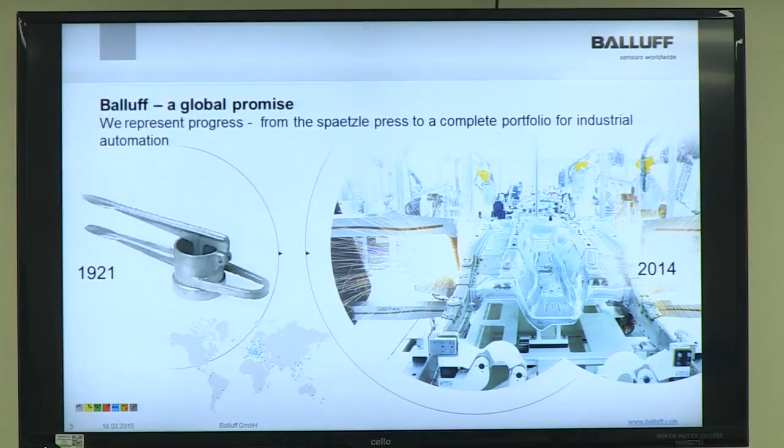So Balluff started in 1921. The first generation, Mr. Balluff, started manufacturing the noodle press. That was the first thing he did. Many developments since then, and through 90 years, factory automation, industrial automation is what we're involved with now.

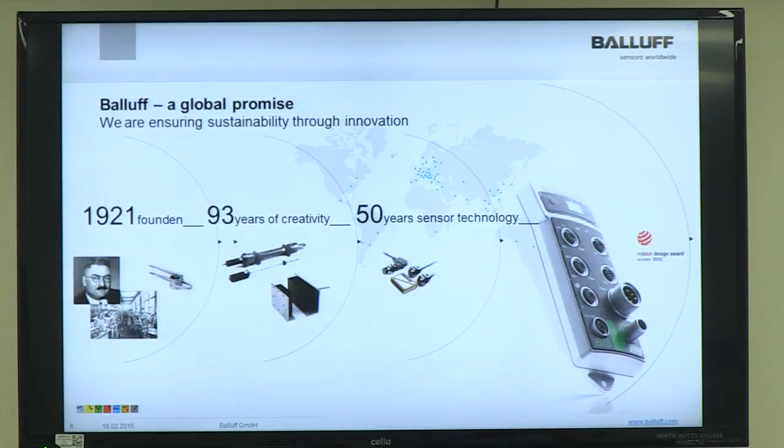After noodle presses and bike shops, around 50 years ago we started manufacturing the first electrical and mechanical technologies, and that's when we first started applying for patents on inductive and mechanical technologies. We started making the first remote sensor systems - this is power and signal across an air gap, a technology Balluff is very proud of, and you can see some of that in the case and some of the demonstration rigs in the foyer. Right up to this particular product, one of our RFID products, of which we've won many awards.

The Red Dot Design Award is something we won for that, a design award we're awarded across the whole industry - people making kitchens, consumer goods - so it's a design technology award. Again, something Balluff is very proud of.

So we break the product and then take it out and say, look, component X has failed. Let's find a new manufacturer or a different way of putting that component on there. Test it again - it will last a few hours longer. This doesn't mean we offer different warranties; it just means intrinsically the way we develop our products is the best it can be.

And just before we get onto the hydraulic side, we have a massive range of products. We fall into business units: object detection, that's the inductive, mechanical, capacitive, ultrasonic sensors I mentioned.

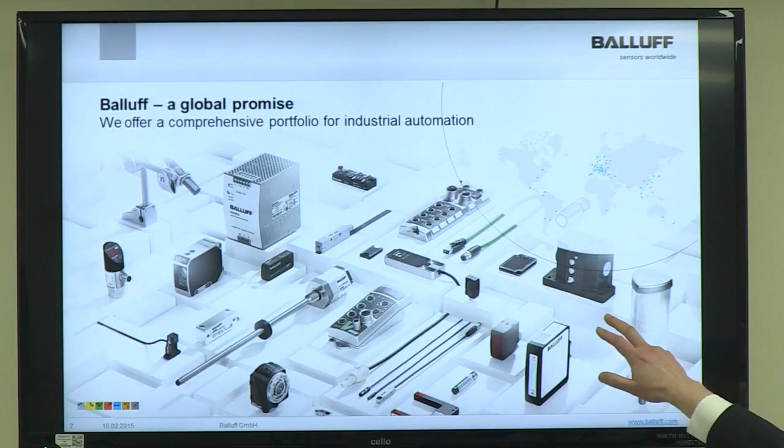The block at the top there is from our networking department, and with the IO-Link system which we've now got, which you can see again in the case and out in the foyer, we've really started to make inroads into factory automation in the last few years - really changing the way people automate factories and moving towards a more smart factory. Something we can chat about afterwards, after the presentation, if it's of interest.

RFID systems - again, when we started doing these 30 years ago, particularly in machine tools, we really changed the way machine tools and CNC machining was done.

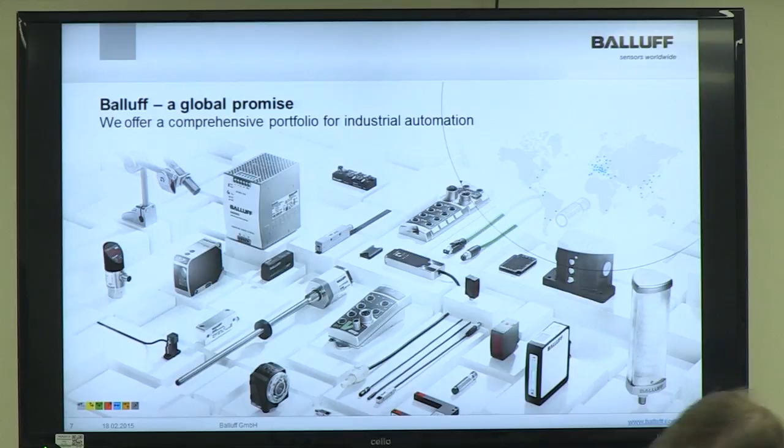An overview of just a couple of products which we get involved with more into the hydraulics industry: pressure sensors, pressure transmitters, fill levels for power packs, accumulators, capacitive sensors.

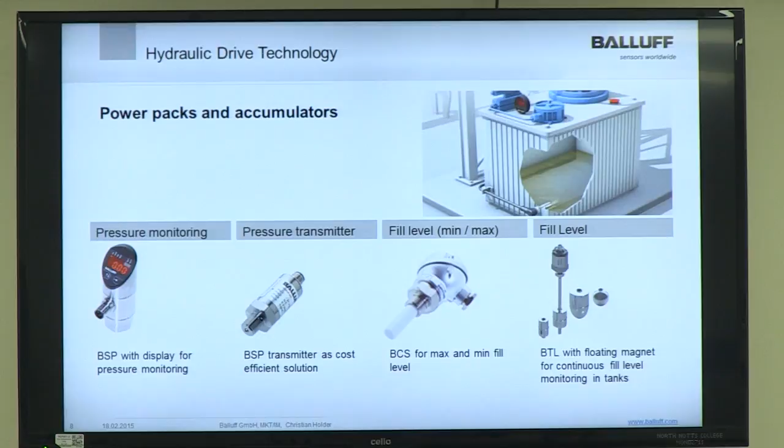We have a technology on a capacitive sensor called Smart Level, which has got a patent on it. What this does, the sensor will ignore foaming in a tank and only give a true level output, and also ignore dirt and build up on the sensor front face, so it doesn't give any false readings.

And then we get involved in sensors and transducers inside cylinders, transducers in the cylinder, sensors for detecting piston end stops, soft stops, spool and valve controlling as well.

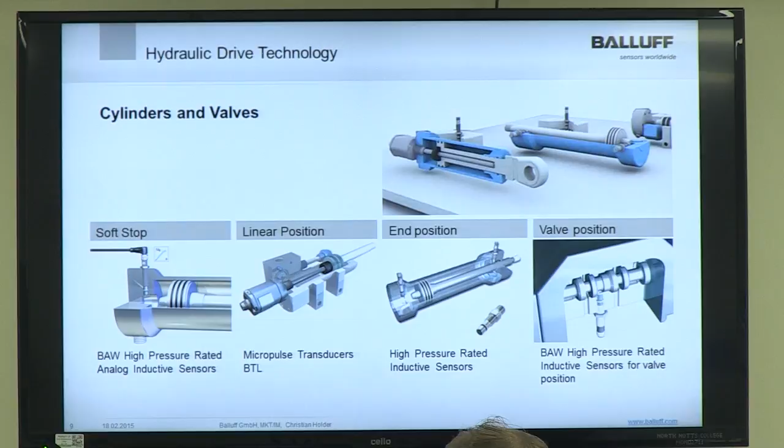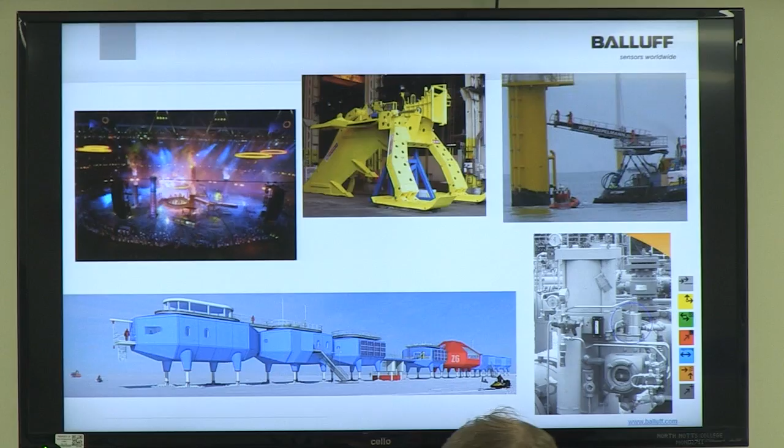So into our world of hydraulics, there's automation all around, it's increasing all the time. Personally, we get involved in all areas except, I suppose we stop at the PLC, so from the PLC downwards. But the sensor switches and automation in the panel, in the accumulators, in the power packs, in the valves, and also in the hydraulic actuators.

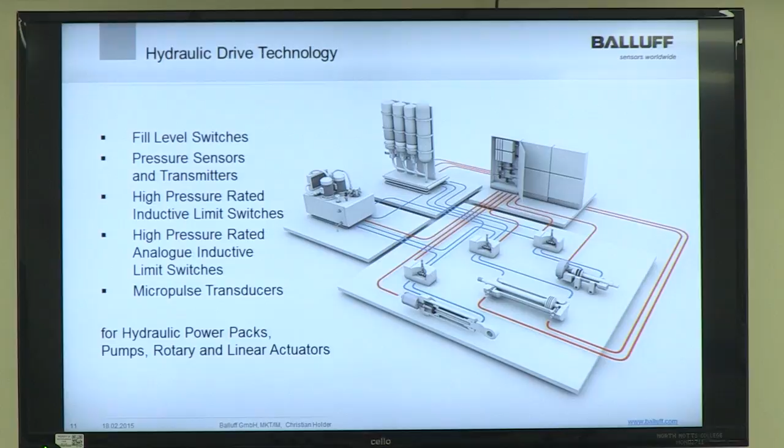So I just want to focus now on the hydraulic actuator area and just talk about some of the positioning technology around that.

Why do we need to know where our actuator is? The same as any automation trends, we need to do things faster, we need higher accuracy, we need less downtime, better production rates. Therefore we need to monitor all the way along the cylinder what's happening, where is our position. So quite often just on or off is not good enough in the world of automation these days.

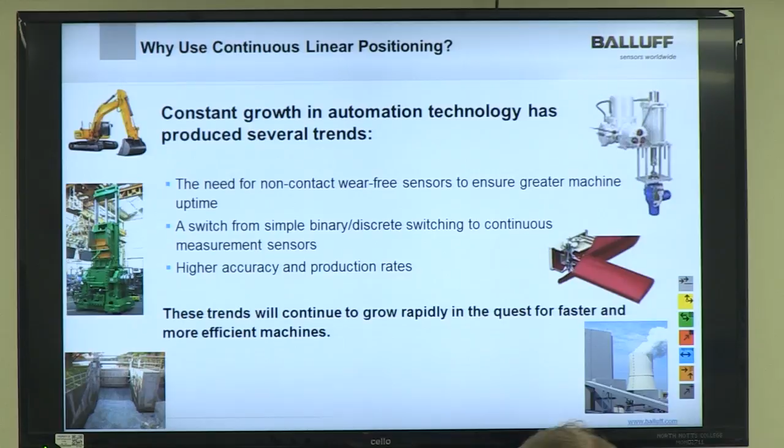So linear feedback generally falls into three fields. First, we've got to control linear motion, which is closed loop control, such as a flight simulator, or something like this, where you need to move it fast, slow it down, move it again. And when you're selecting a sensor for this application on the hydraulic cylinder, speed and accuracy are the most important things you need.

The next area, and I think this is where the bulk of hydraulic actuators fall into for position feedback, would be monitoring linear position - monitoring the position of a cylinder. Did it get there? Has it come all the way back? It's like an infinitely variable proximity switch on a hydraulic cylinder. The most important factor we need to consider here is repeat accuracy on the sensor which we select.

And finally, to make measurements with our cylinder - the actuator needs to measure where we are, whether we're profiling something, doing a cut to length measurement. In the device we select here, the most important thing is the linearity of the device, so the accuracy needs to have high linearity on there. So they're often different in the different devices you might select.

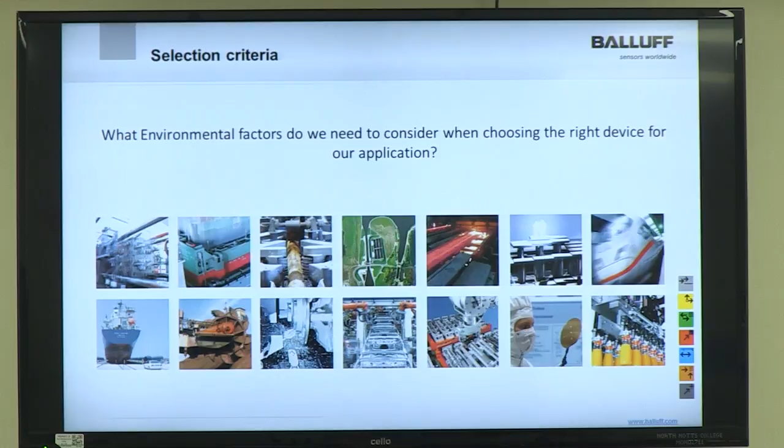So we've talked about accuracy. Environmental factors may seem obvious, but there are so many considerations we have to take into account. Some images here, civil engineering - is it out in all sorts of weather? Is it underwater? Is it seawater? Temperature - am I in a steel mill? Am I, like the previous picture, out in the snow? Is it on a power press, being rattled, shaken, on a train?

Access to the device itself - do I need to get to it? Do I need to change it? Do I need to maintain it? How big does it need to be? Is it a fit and forget device? Do I need to service the device?

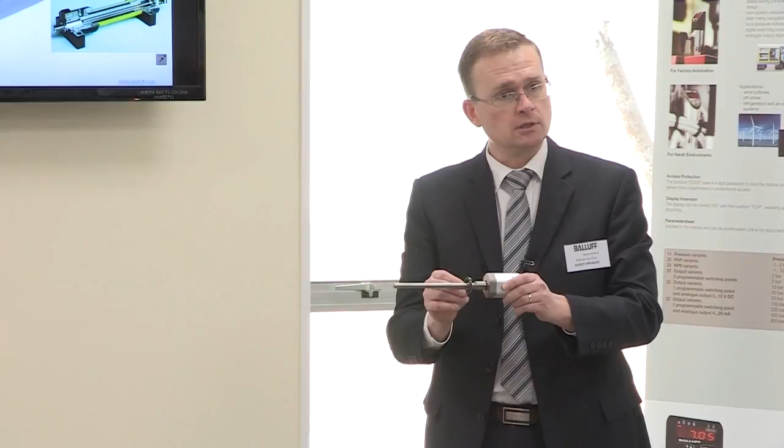On the hydraulic cylinder, generally for a transducer, we can sense internal or external. If we're internal, let's find a transducer - this is just one of our position devices. In the image on the right, we've got a transducer in a cutaway of a hydraulic cylinder. We'd have a magnet element bolted to the back of the piston, and as it moves up and down the rod, we've got a gun drill hole down the cylinder, giving us position feedback. From environmental considerations, if starting a project afresh with no time or money constraints, we'd always put a transducer inside the cylinder - it's the best packaging we can have. But many times you can't do that, so for retrofit applications there are many products on the market which you can mount external, so you could piggyback that on the outside of a hydraulic cylinder.

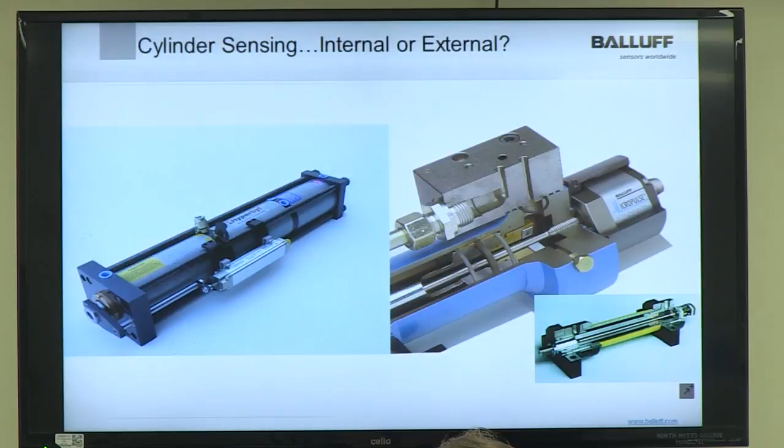Just a bit more into cylinder feedback systems. We discussed internal devices, and we'll discuss the technologies next - magnetostrictive, potentiometers and LVDTs, these are some of the popular technologies for position feedback on a cylinder. Not exhaustive, but some of the popular ones. For longer stroke cylinders, 10 metres plus, telescopic cylinders, lots of the cylinder manufacturers have developed their own particular measuring systems.

Limit switches on a cylinder - we could have an inductive sensor, this is just detecting metal, detecting the piston as it comes along. We've got a pressure seal and a high pressure front face here just to detect the cylinder position. We could also have the inductive sensor external to the cylinder, just picking up on a flag as it moves by, or this could be a mechanical limit switch mounted external.

Probably down to the lower cost cylinders, probably use smaller, more compact, used more in the mobile agricultural market. In recent years these have probably had no feedback whatsoever, but I think that's changing. Certainly in the last year or so, we've been involved in more and more inquiries to get position feedback sensors in there. But it's very expensive to do for a mobile cylinder - you've got to gun drill the cylinder and get the transducer in. Balluff are working on new technologies here to put into hydraulic cylinders for the mobile market, and hopefully if you're back here next year, we'll be able to chat about that technology.

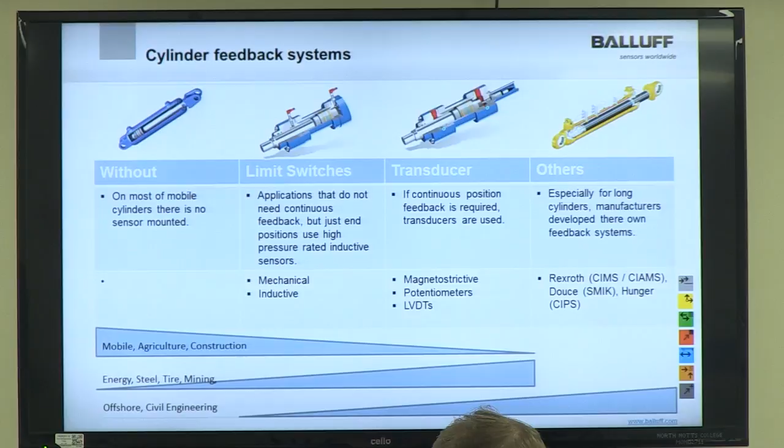Quickly onto the different technologies we get involved with in hydraulic actuator control. The first one, linear potentiometers - these are at the lower end price segment of the market. Analog output devices, lower accuracy, and they're less reliable. Depends what application you're using them for, but because it's a contact device, in some applications they will wear out.

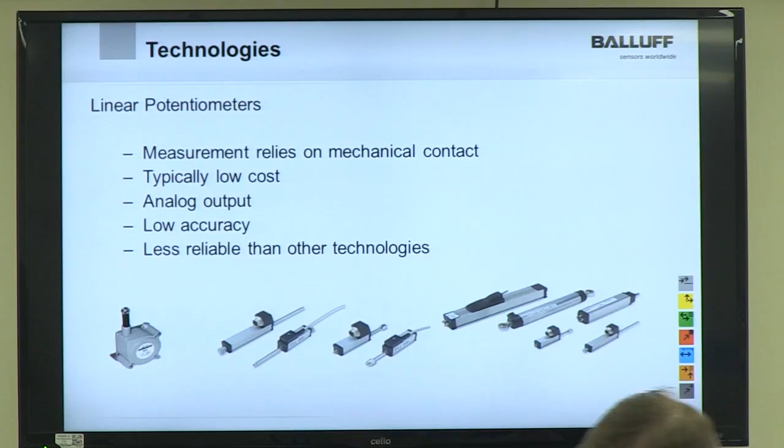So how they work: we've got a fixed resistive strip of a known resistance, voltage across it, and then the wiper, the position element, moves up and down this strip, and at one end there'll be a greater resistance or lesser resistance at the other end, giving a proportional output. Some applications are great, but say on an injection moulding machine, for example, if you're going 24/7 back and forth to the same part all day long, there's the potential for that to wear out in that one zone.

Next technology to talk about is LVDTs - this term is sometimes used to describe any position feedback device, but it's actually a technology in its own right, linear variable differential transformer. As the name suggests, it's a transformer - voltage in the primary windings, then we have a ferrite core moving in and out, inducing a different output voltage on the secondary windings. Basically how far the core moves in and out gives us a different output. This device is a non-contact device, better on vibrations than potentiometers, better on temperatures. But along with the potentiometer, because it's inherently a voltage device, that's all you get out of it, so if you want any other sort of signal, you've got to do extra signal conditioning on there.

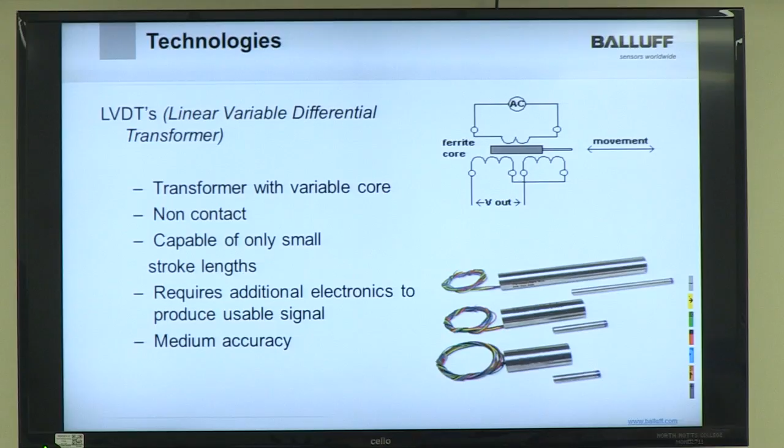Moving on now to magnetostrictive sensors - again these are non-contact like the LVDTs. We can get much higher accuracies out of these devices, and I'll explain how they work, but because it's a digital signal that comes out of them, the manufacturers generally have onboard signal processing to change it to analog, digital, field bus, any sort of interface you want. They're usually at least IP67. So how do they work?

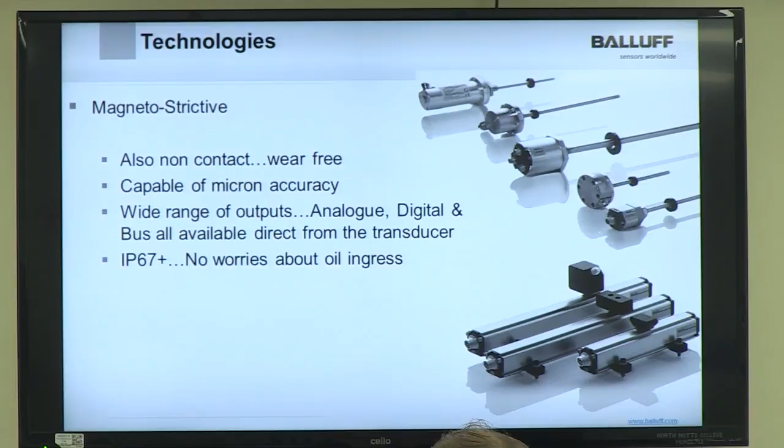On the inside of each transducer we've got a magnetostrictive device and a waveguide, which looks like this. Down the centre of this waveguide there's a thin copper wire. As you can see from the animation, essentially we have a current pulse which initiates an electromagnetic wave that moves up and down this rod.

The position marker, the magnet, interferes with this wave and creates what we call a strain wave. One part of this wave is bounced up and damped at one end, represented by the blue here. The other end comes back down to our electronics. The time from sending out our start pulse to the time it takes this strain wave to get back is proportional to the distance, as in a time of flight sensor. So that's how the magnetostrictive devices work.

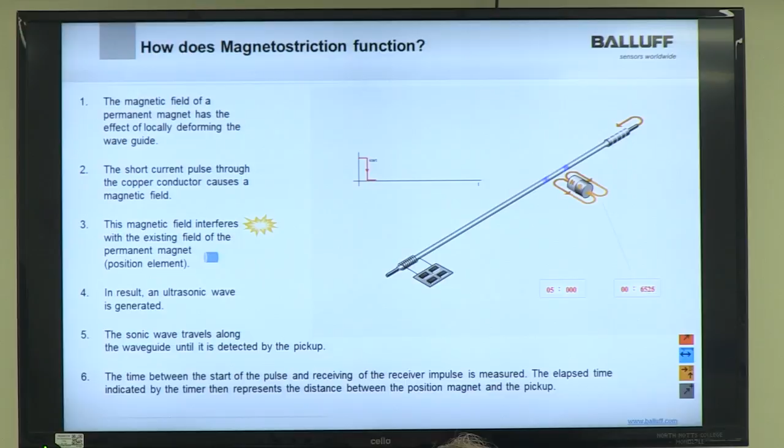Just briefly, let's look at the outputs from position feedback devices on hydraulic actuators. Analog is still by far the most common, for obvious reasons - people know what it is, and we can buy analog interface cards widely available. But there are limitations to it. For example, one limitation on a popular signal is 4 to 20 milliamps. You've got 16 milliamps to divide up across the stroke of your transducer, so the longer transducer you've got - 1, 2, 4, 5 meters - you're going to get less resolution.

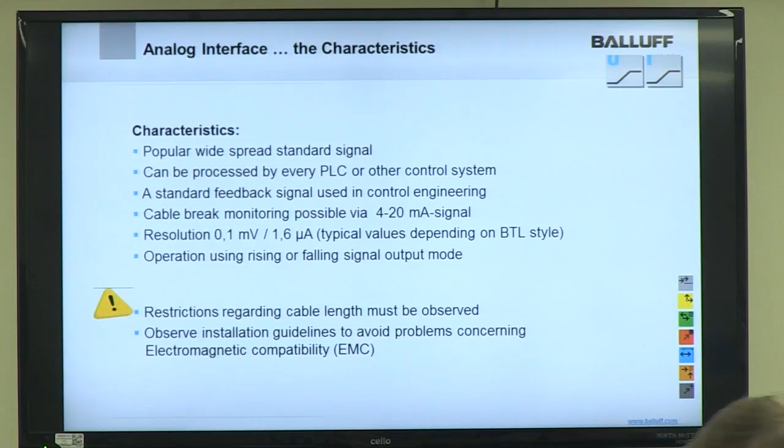We've got different sorts of interfaces. For high end motion, lots of people are using SSI, synchronous serial interface, digital outputs, and then analog interfaces for low end motion. It says on this slide tomorrow's preferred interfaces, but certainly from our experience, the future's here already. We've got lots of customers talking to us about Ethernet-based systems for high end motion control, and then down at medium and low end positioning, we've got more customers talking about moving from analog to digital field bus systems or IO-Link systems.

The IO-Link systems I mentioned earlier, from Balluff's point of view, are helping us contribute towards what the industry is talking about as Industry 4.0 - a German-led phrase coined as the fourth industrial revolution, starting with steam as the first, then electrical devices, the digital revolution, and now software and smart systems, the fourth generation, looking at how we can get autonomous machines, develop software, and create really smart factories. Certainly IO-Link is helping us do that because it allows easy connections, remote diagnostics and remote setups from some of our components.

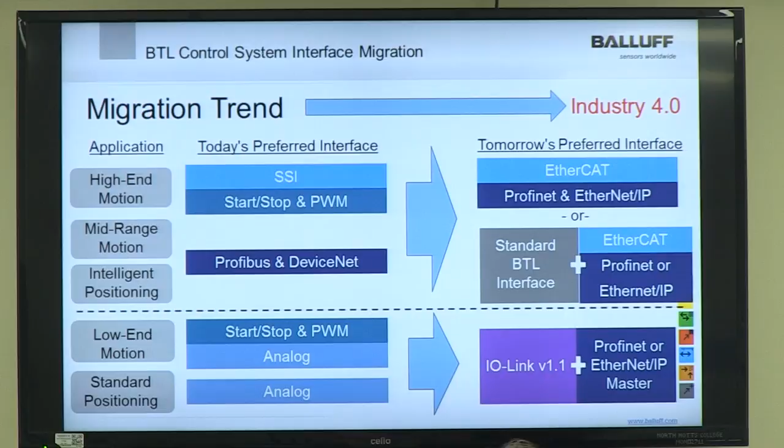That's a quick example of how it would work in hydraulics, and we've worked on real projects in the last 12 months where we've used our IO-Link systems with a field bus system at the top. IO-Link allows us a 3-wire point-to-point communication system to sensors, actuators, indicators, and components in the panel, and it's allowing us to step even further towards the smart factory.

So now I want to go through a few applications - hopefully there'll be something relevant to everyone here. Renewable energy, wind power - personally for us at Balluff, it's something we've been involved in since the infancy of wind power.

Just a few applications: hydraulic pitch control. Most hydraulic pitch control turbines you see out there will have a Balluff transducer in there, 3 in each turbine controlling the pitch of the blades to slow it down and speed it up. There are also sensors for rotor lock position so you can stop the turbine securely to make sure people can get in for servicing.

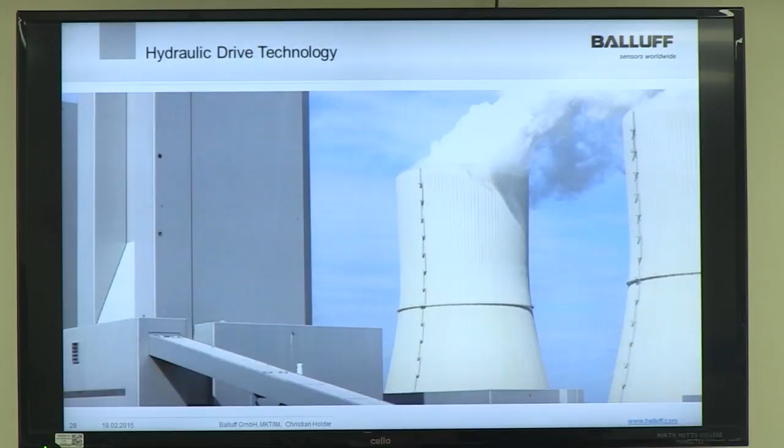In conventional power generation, there's hydraulic cylinders with feedback on damper controls, diverters, and valves.

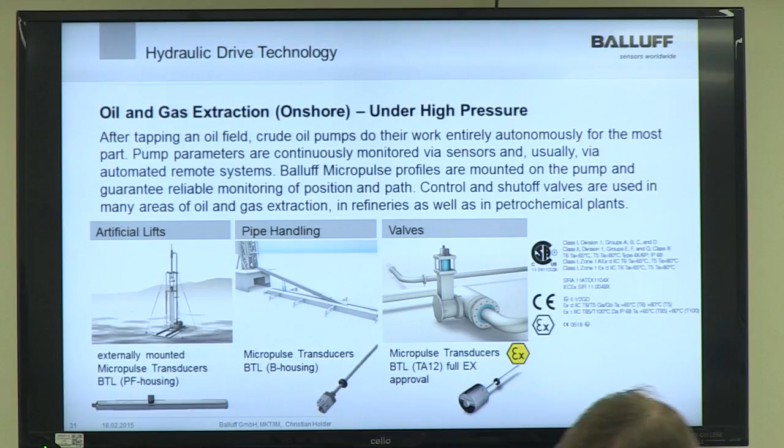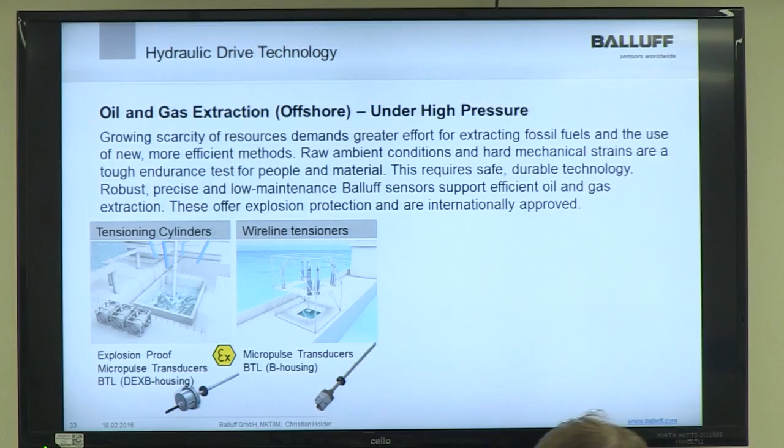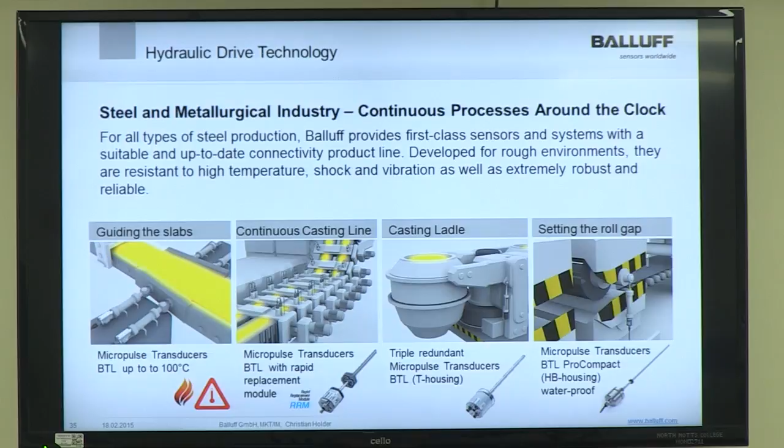So here's an example of our standard industrial transducer, which we took apart earlier. Should there be a problem with it, just 2 bolts out of the back, we can take the electronics head off, just disconnect the wire, and then we can replace the electronics head, should there be a failure or should it get more than likely bashed or something like this. And this is important because these transducers can be 7-8 metres long, so in a hydraulic cylinder, that's a lot of clearance we need to get the device out. So if we can just remove this part and leave that in the cylinder, it's a very useful device to have.

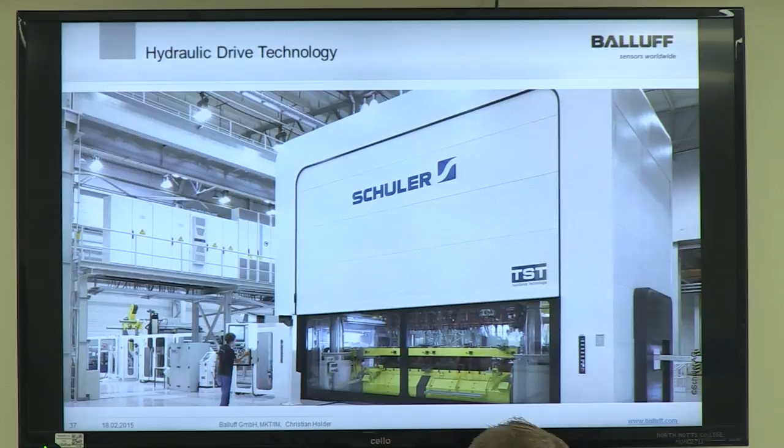Into factory automation, again hydraulics present in factory automation. Position devices, automotive plants, tyre curing presses and the vulcanising process, that you need very accurate control of the presses. Shut-height, height protection, measurement on metal forming. Again, we've been selected on some of these projects because of the vibration ratings we can withstand.

Ship building and products on ships. On ships, there's stabilisers on most ships these days, so there's hydraulic cylinders there, it's controlling the stabilisers as they come out. It allows the captain decision to press a button and essentially be more stable and go through a storm, or maybe have them in a different position and go faster around a storm.

Rudder control, jet propulsion, propeller pitch. We've worked with customers who actually selected our triple redundant transducer for the pitch control. I've not got a sample here today, but the triple redundant is literally 3 electronics heads and 3 separate waveguides in the transducer itself. So the customer will wire up all 3 outputs to be absolutely secure against any sort of problems.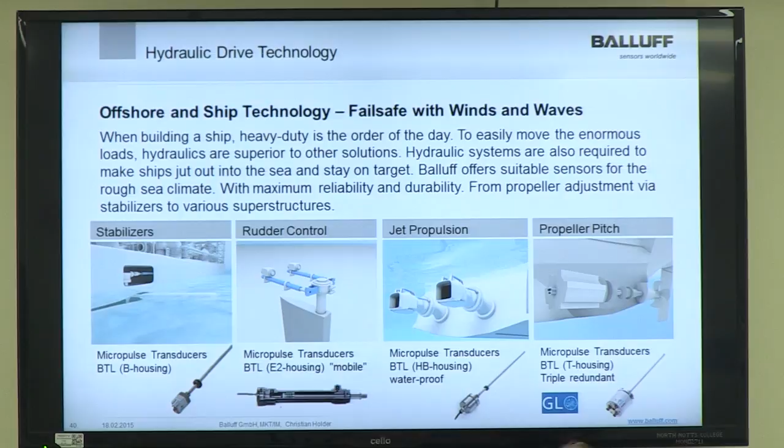So if you really want a fit and forget device, which might be on some sort of rudder control like this, it might be inaccessible to get and change the device.

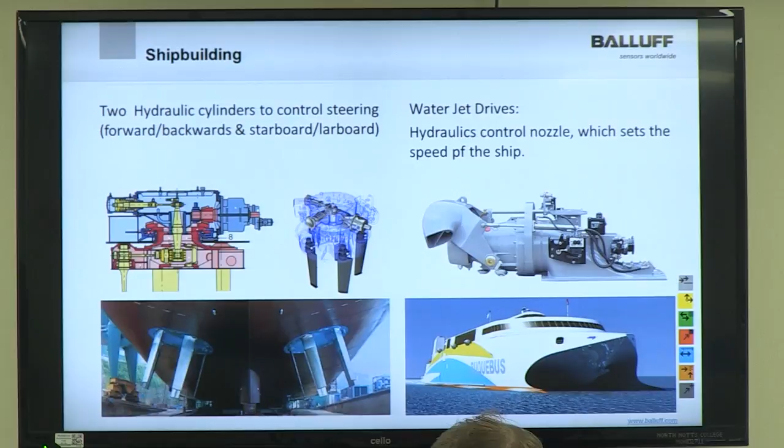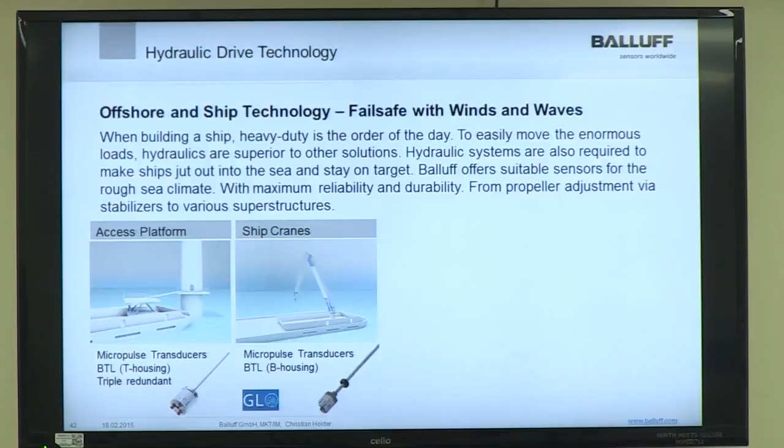Then the actual automation on the ship itself, turbine access systems we talked about before, compensating against the roll of the waves, and handling and automation on ships. The graphic doesn't really do justice to some of the projects which are out there and we've been involved with as well. But there's massive automation, probably images up on the poster on the wall, of pipe handling systems, cable laying systems off the back of vessels, and there's a massive amount of complex hydraulic automation where definitely position feedback is needed.

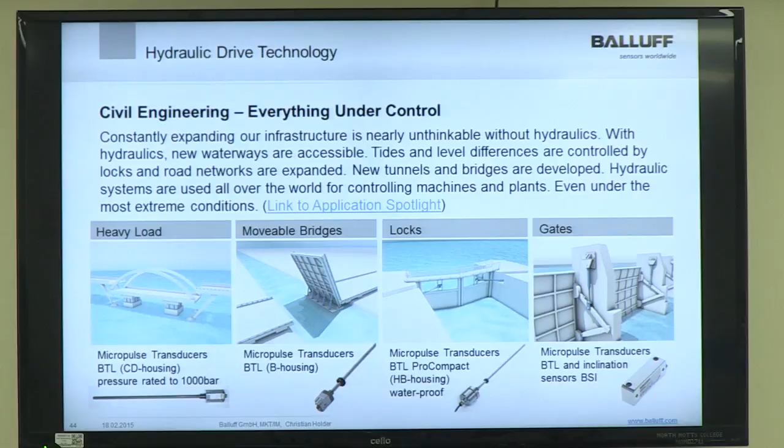Civil engineering projects, lifting bridges, lock gates, tidal barriers, position sensors all around needed for this. Again, personally, some of the projects that Balluff have been involved in, we often seem to select this product now if it's out - we sort of call it our weatherproof device. It's actually capable of doing 40 metres underwater, but it's the same technology inside. It's just a welded housing, and with this sort of conduit gland, we can do a proper termination over the top, and then make this IP69K, and essentially it can be underwater permanently up to 40 metres.

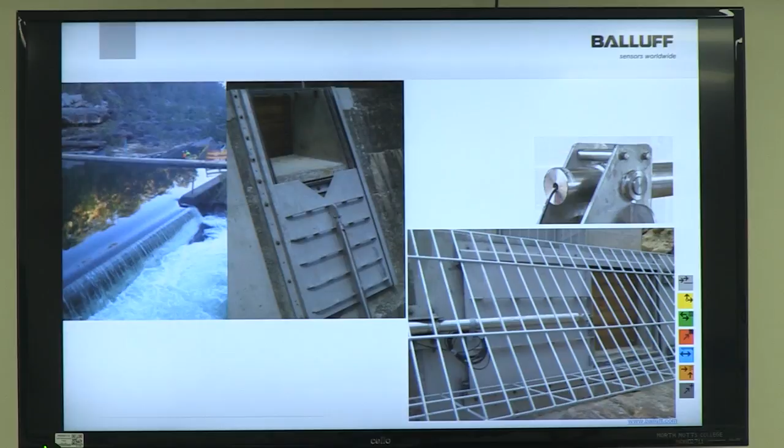Mining applications, the image you just saw representing the tunnelling equipment. My colleagues in Balluff China, getting involved in lots of projects in tunnelling. Long hole drilling, again a project we were selected on was because of vibration, but we also did modifications to pot up the inside of the electronics to even protect it even further.

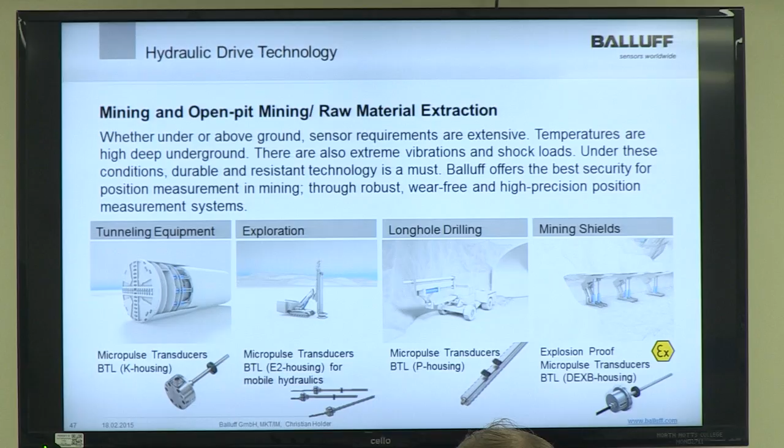I think we mentioned flight simulators before. And the last application I just want to mention we've got involved in, again the customer picked the triple redundant transducer, but for high-speed trains. So we actively tilt the train by 8 degrees so we can power in even faster into the corner.